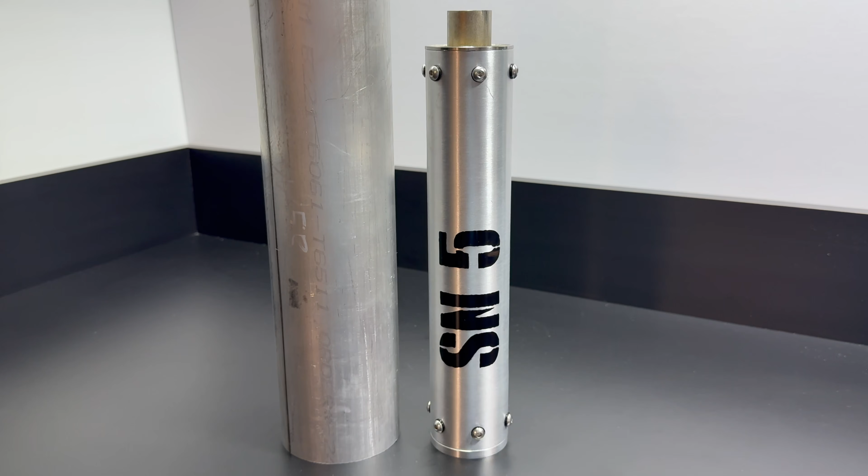For the past few months, I've been working on the biggest rocket motor I've ever built. It's called Mega X, a reusable, 2-foot long, 3.5-inch diameter rocket motor with a total impulse of 5,000 newton seconds and a max thrust of 500 pounds. This motor is over 8 times the size of my second largest, and while it may look similar on the outside, every part of Mega X is far more complex. In today's video, I'll take you through exactly how I designed this rocket motor.

Real quick before we get started, this video is not a tutorial. Rocket motors at this scale can be extremely dangerous, so this video is strictly for educational purposes only. That said, I hope this video could be a great resource for someone interested in the engineering behind Mega X.

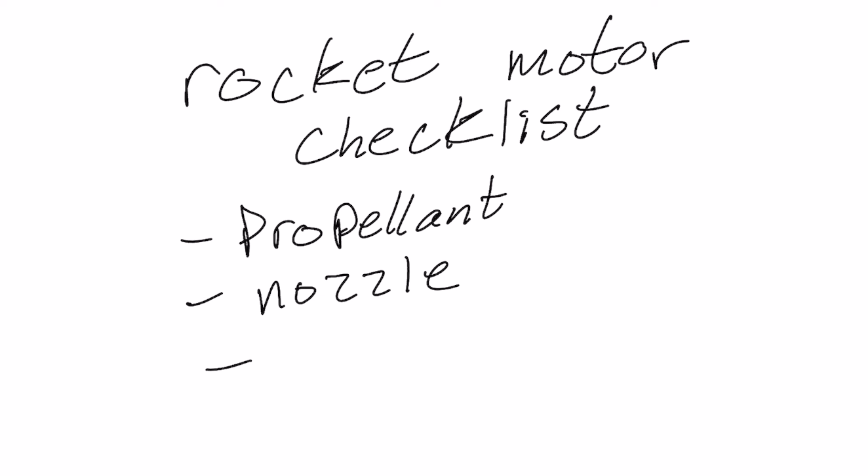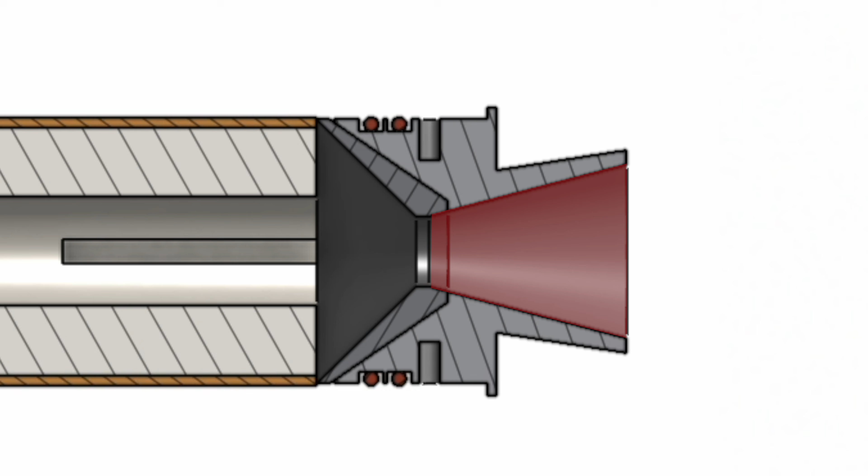Let's start by exploring the parts of a rocket motor. All rocket motors have 4 main parts: the propellant, nozzle, bulkhead, and casing. We'll start off with the propellant. When it's ignited, it rapidly burns and produces a massive amount of hot gas. Next is the nozzle, which has 3 main sections: converging, straight, and diverging. These are shaped to accelerate the gas produced by the burning propellant and direct them out the back to create thrust. The nozzle also has to survive extreme heat and erosion, which is why material and design are so critical.

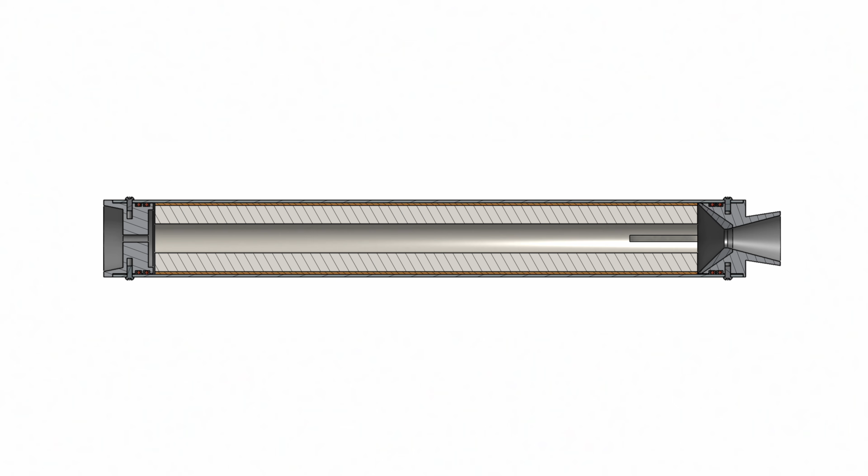Now that the aft section of the motor is covered, let's move on to the forward side. Here we have a bulkhead, which seals off the motor and keeps the gases contained inside. And finally, the casing surrounds the entire motor, giving it structure and providing attachment points for both the nozzle and the bulkhead and keeping the pressure contained. The casing acts as a pressure vessel. It needs to withstand forces of hundreds of pounds per square inch without tearing apart.

Now that you know the basics of a rocket motor, let's move over to simulating Mega X. I personally use a program called OpenMotor. It's a fantastic free application you can download and experiment with yourself. The first step is to define how much propellant I want this rocket motor to hold. For Mega X, that's 24 inches long with an outer diameter of 3 inches. Next, I configure the propellant. For Mega X, that's KNSB. I'll explain more about that in a minute.

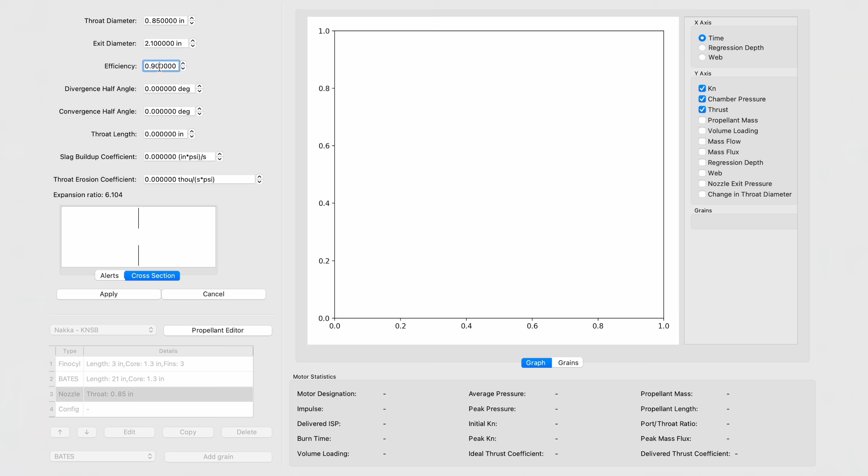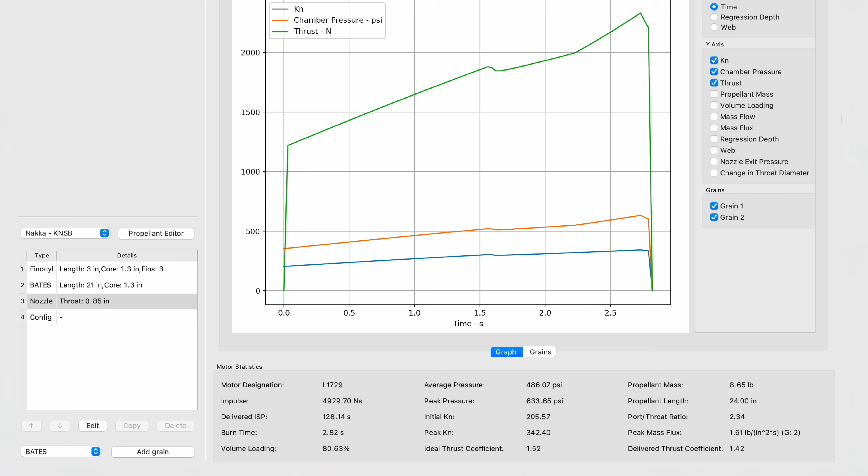Once the propellant is set, I start adding parameters, things like throat diameter, exit diameter, and throat length. At this stage, they're mostly educated guesses, but good enough to run an initial simulation. With everything entered, I hit simulate. OpenMotor generates a full set of data: total impulse, burn time, thrust curve, propellant mass, chamber pressure, and much more. Without simulation software like this, designing a rocket motor like this would be way more difficult.

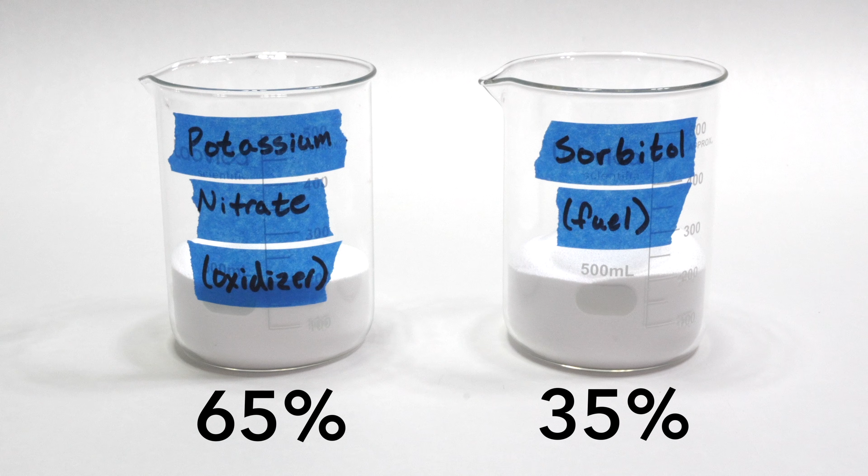As I mentioned earlier, the propellant for this rocket motor is KNSB, which stands for potassium nitrate and sorbitol. The sorbitol acts as a fuel, while the potassium nitrate provides the oxygen to keep it burning. A typical KNSB motor uses about 65% potassium nitrate and 35% sorbitol, and that's the ratio that I'm using here. Where I experiment is in the particle size of the potassium nitrate. I use 2 different kinds of potassium nitrate for this rocket motor: milled and granular. This simply refers to how fine the particles are, milled being more like a powder and granular being coarser crystals.

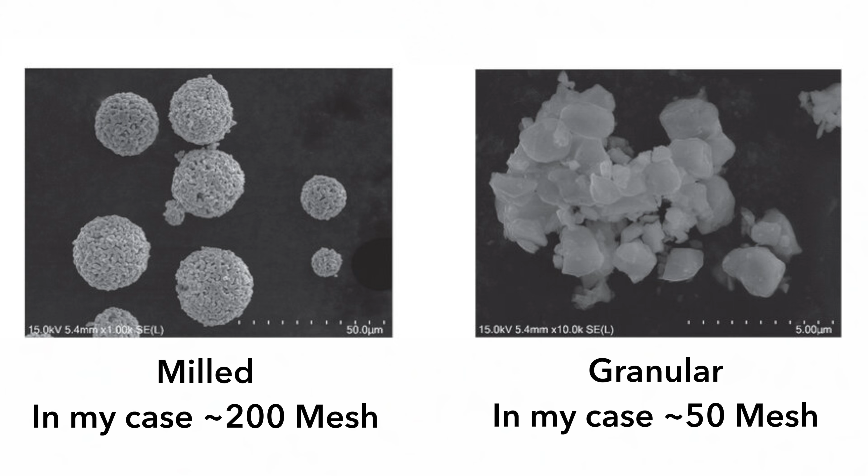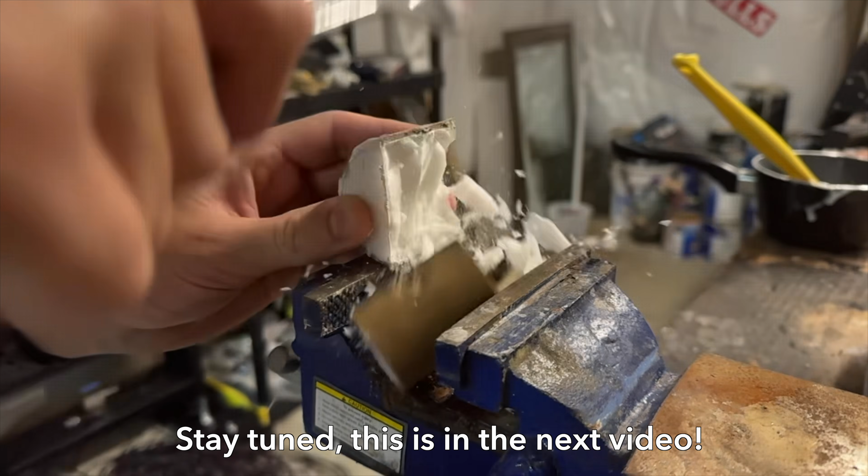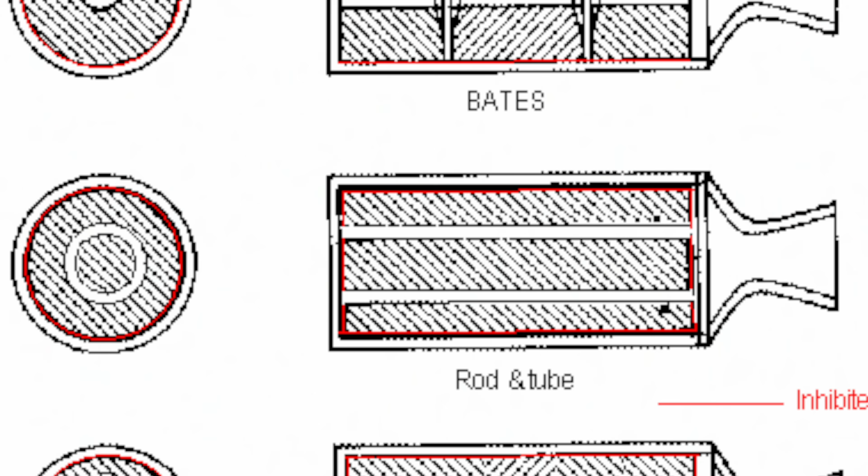I can control not only the performance of the burn, but also the viscosity of the molten propellant during casting. I've run a lot of tests dialing this in, and I'll be going much deeper into that in an upcoming propellant-focused video. For this motor, I'm also using 2 different grain geometries. One is a simple straight cylinder with a core through the center. The other is called a finocyl, which gets its name because the core has fins cut into it. These geometries burn differently. A finocyl has much more surface area at ignition, which means a higher thrust at the very start of the burn. That quick boost makes it easier for the rocket to get off the pad and gain stability.

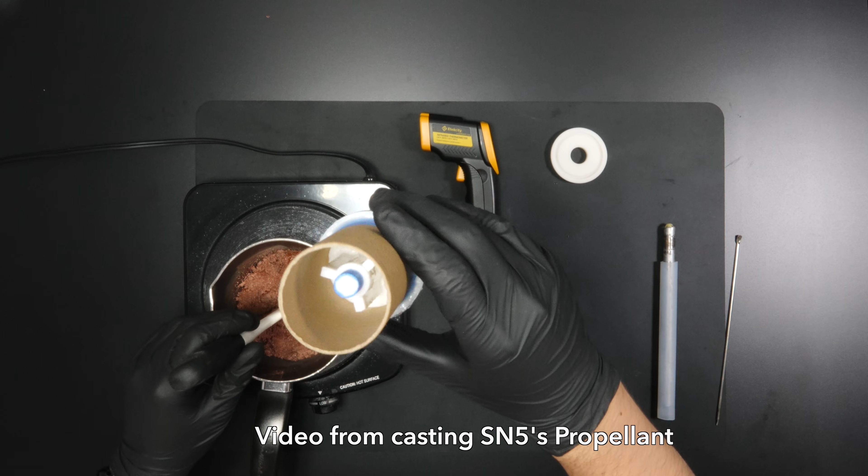Casting the propellant could be one of the most complex parts of building a rocket motor. Getting the right consistency, pouring it evenly, and making sure there's no air bubbles or voids takes a lot of practice and careful design. There's so much to it. I'll be making a full video dedicated to just propellant casting. Now let's move on to actually designing the nozzle.

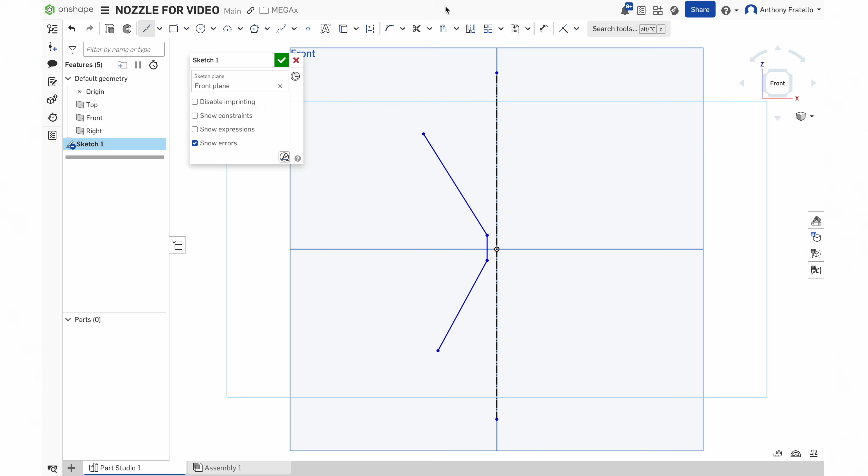I start by drawing the converging half angle, the throat, and the diverging half angle. These parameters come directly from the motor simulation. Once those are in place, I connect all the lines and get this. There's a few steps I missed, but I'll get back to them in a minute. This nozzle is primarily made out of 6061 aluminum. Aluminum is great because it's lightweight, easy to machine, and relatively inexpensive.

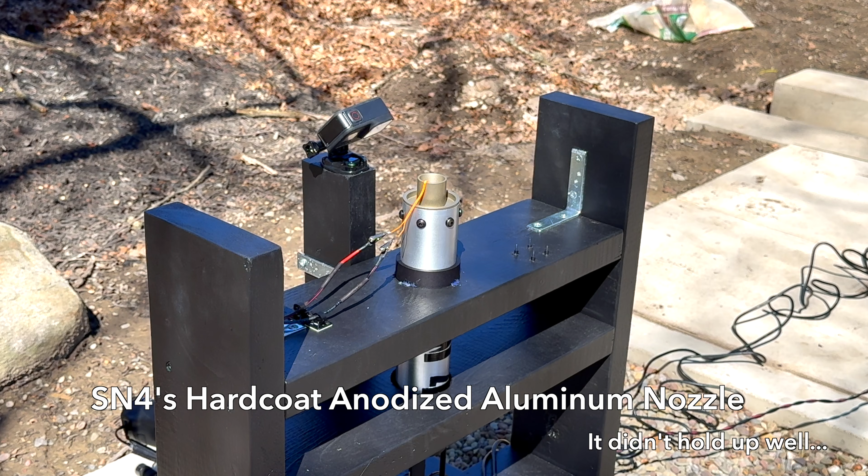But aluminum has a low melting point, so to handle this extreme heating, I added a graphite insert in the areas of peak thermal load. Graphite is very resistant to melting or eroding, with a much higher melting point than aluminum. The insert covers the entire converging section, the throat, and extends slightly beyond the start of the diverging section.

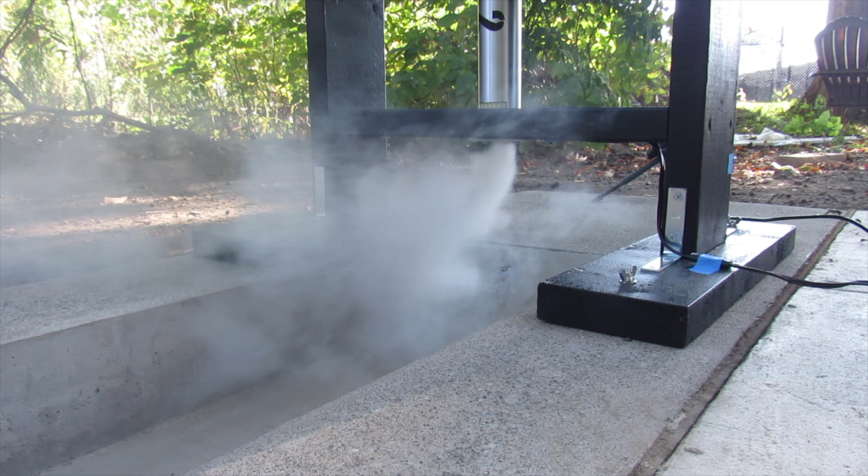From my SN series rocket motors, I've learned a lot about where these inserts fail. On SN4, I stopped its stainless steel insert right at the throat, but the aluminum beyond this was badly eroded. That's why for Mega X, I've extended the insert past the throat for extra protection. I also designed the insert to be removable. Since Mega X was designed with reusability in mind, this was a key part. This makes the nozzle far more serviceable and helps me maintain a faster test cadence.

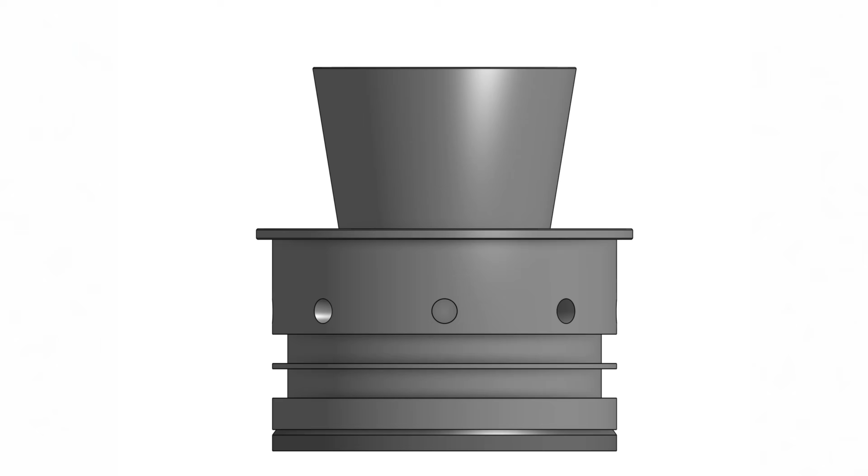Now let's go back to one detail I skipped earlier: sealing the nozzle against the casing. These two grooves on the nozzle are designed to hold O-rings. The nozzle's outer diameter is slightly smaller than the inner diameter of the casing, which leaves a small gap. The O-ring compresses into that gap and creates a tight seal, keeping hot gases from escaping.

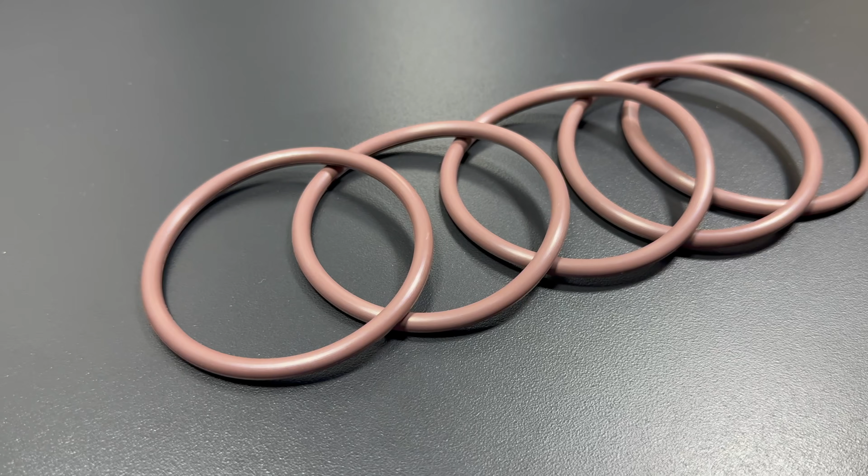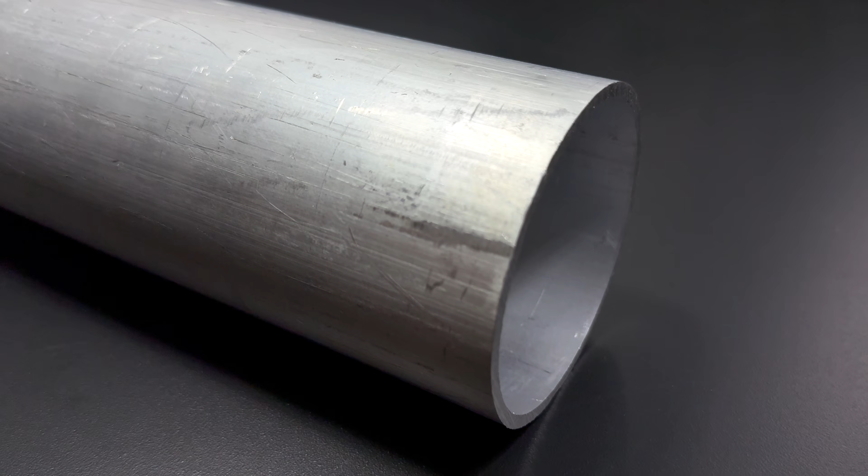O-rings come in a wide range of shapes, sizes, and materials, and they're used in everything from plumbing to aerospace. To size mine correctly, I relied on two trusted resources, the Parker O-ring handbook and the Trelleborg O-ring calculator. For MEGAx, I chose a thicker O-ring profile. The advantage to using a thicker O-ring is that it has more contact area and can better conform into small imperfections in the nozzle or casing. The trade-off though is it takes a lot more force to press the nozzle into the casing.

On my smaller motors, I usually get away with a single O-ring, but at this scale, it's smarter to add a backup. That way, if the first seal fails, the second can still hold the pressure. These O-rings are made from a high-temperature material called FKM, designed to withstand extreme heat and pressure inside the motor.

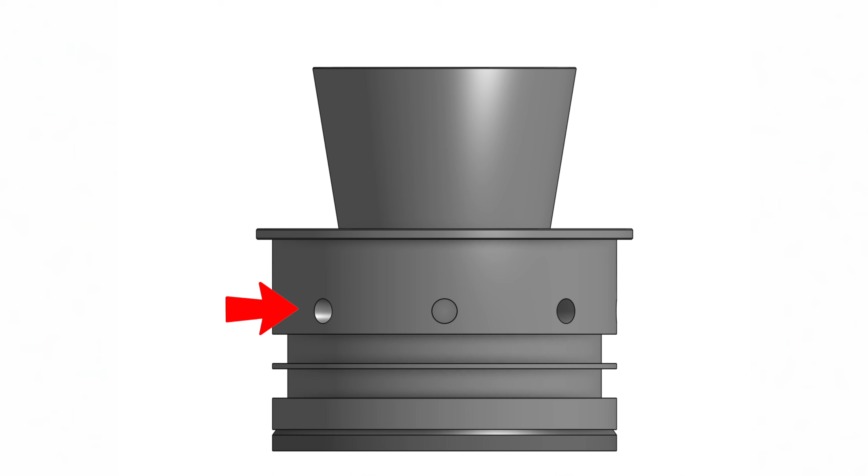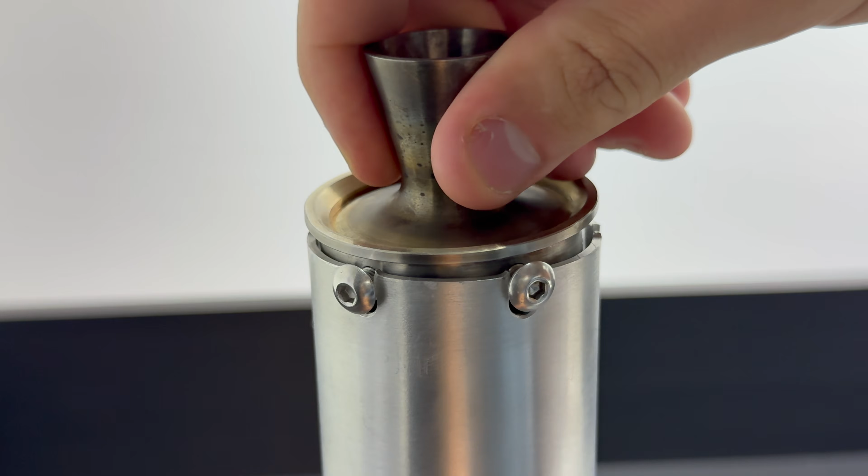Right past the O-ring groove, you'll notice a series of 8 holes. These are threaded to accept bolts to lock the nozzle into the casing. There are other ways to secure a nozzle and bulkhead, but radial bolts are straightforward to machine and reliable if designed properly. The biggest design consideration with radial bolts is preventing what's called tear out. Tear out happens when the bolts shear through the casing wall under pressure and literally rip themselves free.

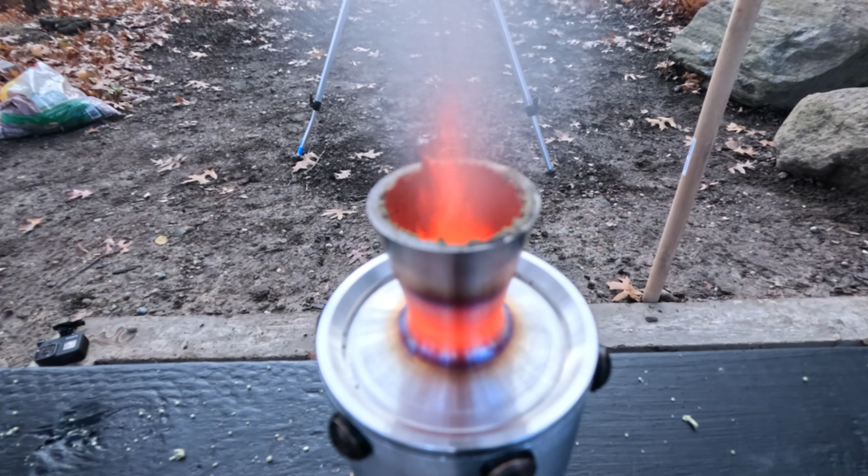This isn't just a theory, it actually happened on SN3. My calculations showed the bolts were strong enough for the first firing, and they were, but I didn't account for fatigue. By the second firing, the weakened bolt holes failed and the entire nozzle blew out of the casing. For MEGAx, the casing walls are much thicker, which resists tear out far better. And instead of using the bare minimum amount of bolts, I've added a few for redundancy. This makes sure the nozzle stays locked in place even if the pressure is more than expected.

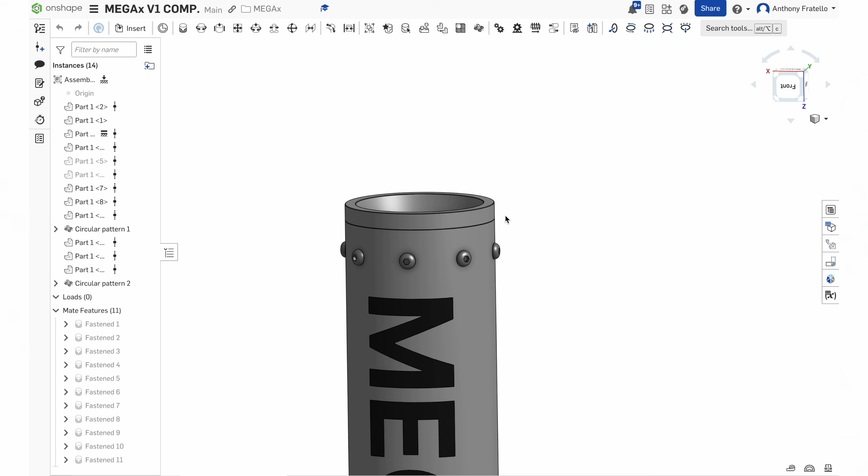Now, moving on to the bulkhead. This part is also made from aluminum, and like the nozzle, it has 2 O-ring grooves machined into it. The bulkhead is also secured with the same series of 8 radial bolts, which locks it into the casing and prevents it from blowing out under pressure. It also has a 1/8 inch NPT threaded hole for a pressure transducer.

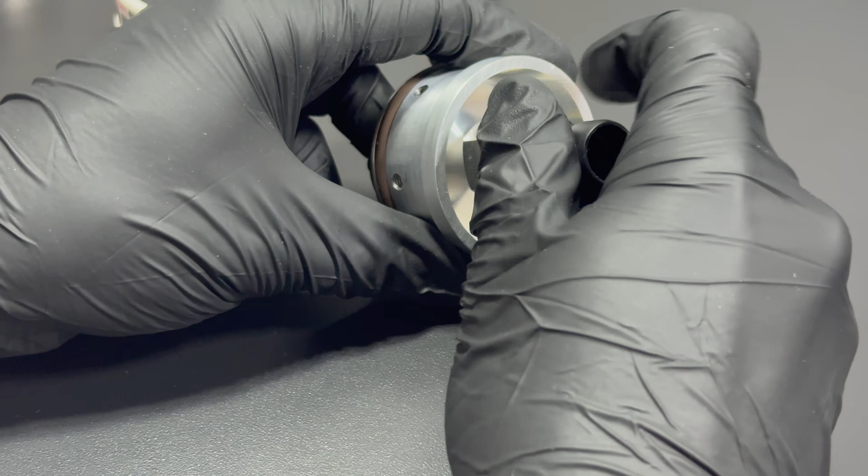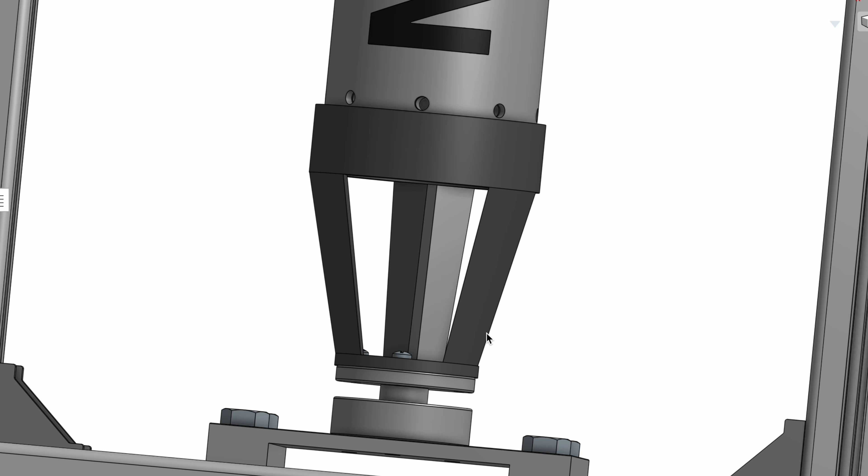I used a very similar setup on SN4 and SN5. It worked very well with collecting real-time pressure data inside of the chamber. This lets me compare the actual pressure curve to the simulated pressure curve to see how the motor performed. The bulkhead also connects directly to the load cell adapter. That's how I'll measure the thrust of the motor, turning the motor not just into a test firing, but also a data gathering experiment. More on that in the separate test stand video.

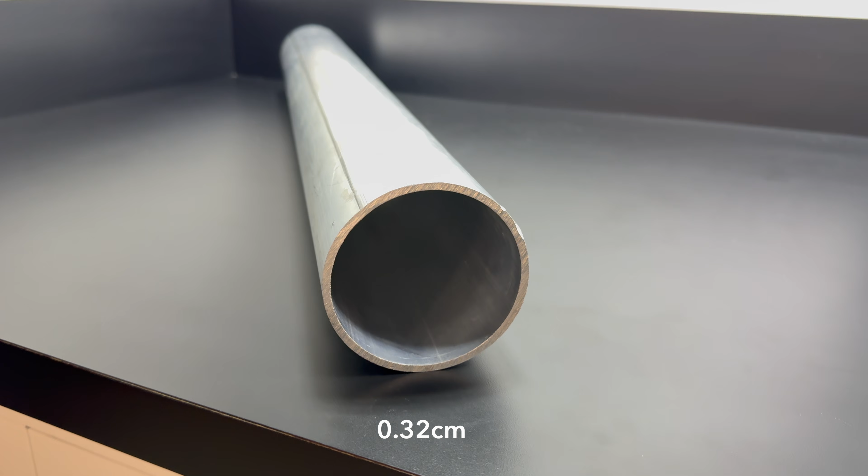And finally, we have the casing, the part that holds everything together. For Mega X, I'm using an aluminum tube with a 3.5 inch outer diameter and a 3.25 inch inner diameter, which gives a wall thickness of 1/8 inch. I could have gone thinner to save on some weight, but I really want to make sure this casing does not burst. After a test, the casing will experience heat and pressure cycling, and that extra strength means it can handle multiple firings without weakening as quickly. So while it'll add some extra weight, the trade-off is a much safer motor.

And this is how I designed my most powerful rocket motor yet. And this is just the beginning for Mega X.